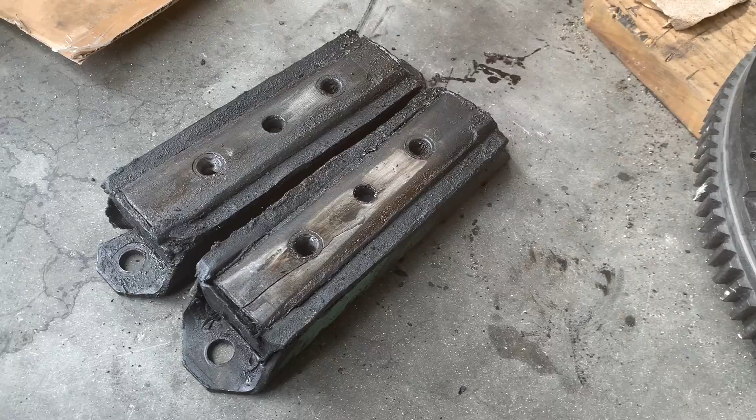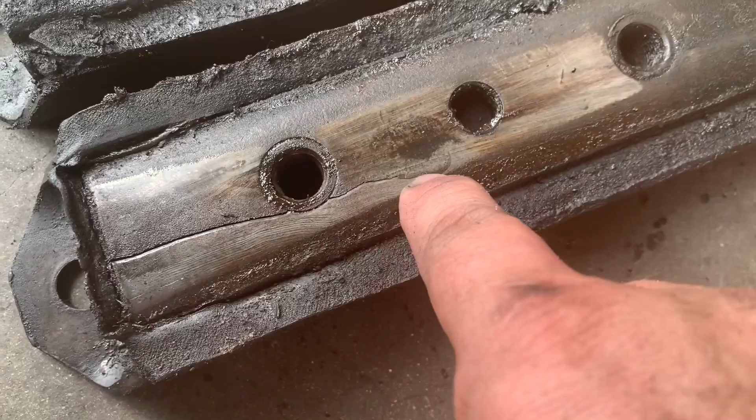So these GM mounts really needed to be changed. These are the engine mounts, the motor mounts. This one here, there's a big split, crack down the metal there. But the bigger problem with it is that you see this side here is recessed and this side is raised. So I'll turn it to a side here. So the rubber has compressed where it's not in alignment.

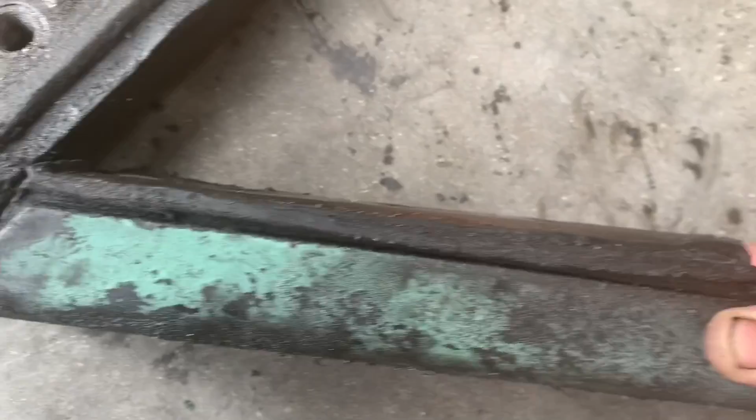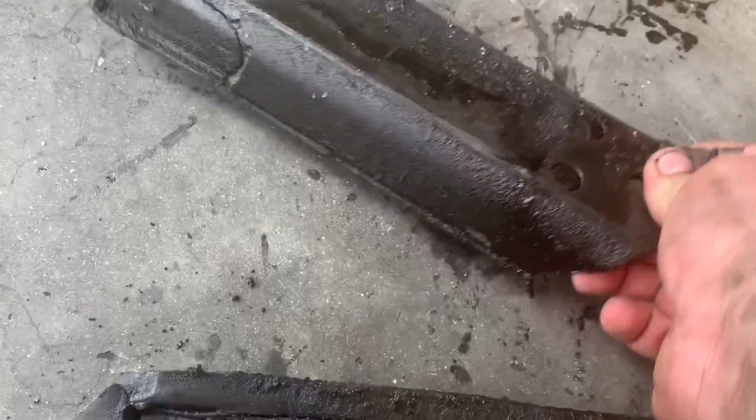Now, I originally thought one of these was missing the bolt that goes here, but it turns out both of them were missing a bolt. So they only had one bolt in each side. And then this one looks pretty good here. It's like height-wise and rubber-wise, but something has caused a lot of stress to it that the metal is just cracked and broken away. It's broken this way, there's a break there, and then this whole side has broken off.

So I don't know what kind of a strange load that would be that would do that, but this was the side that was missing the bolt. So, oh, and this one was just finger tight too, so that's really been loose in there. Obviously the whole motor was moving around. He had a lot of clutch chatter, but that was making the whole engine move too, because they were missing bolts and loose bolts and bad rubber.

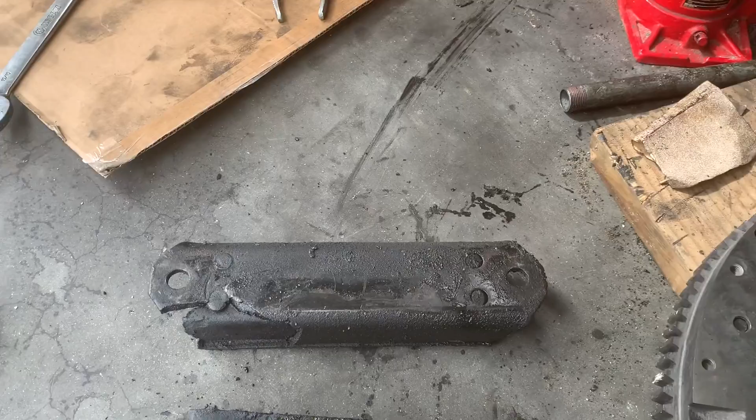So I've got it jacked up now. I didn't pull the studs out on this one because I had the transmission off. This is the easiest way to do it. And I'll just get the new one slid back in there. Get the new engine mounts on, and then get the flywheel back on today. The clutch is supposed to come in today.

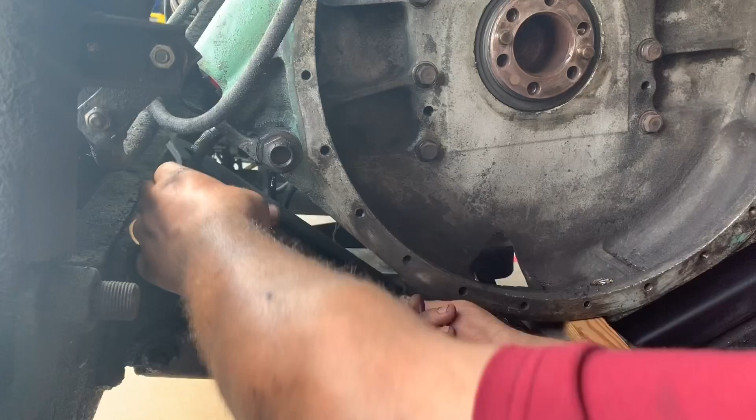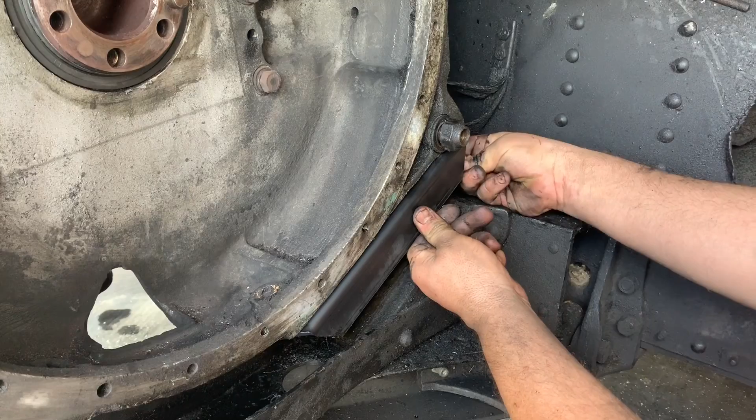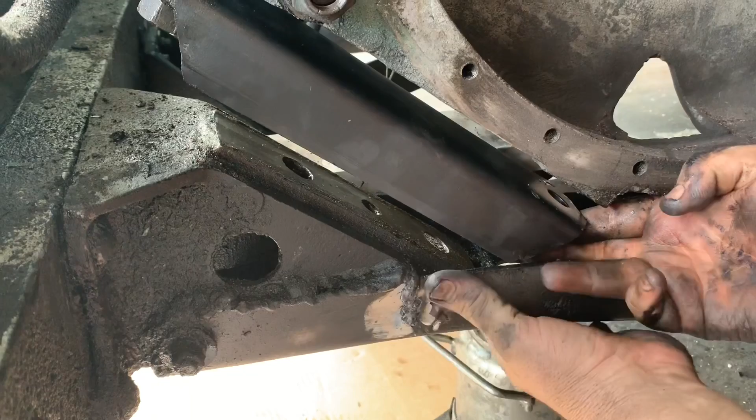All right, so I got it jacked up here, and I'm gonna put the new mounts in. And I'll lower it back down somewhat, and then get it ready to go. Lose a finger if it comes down.

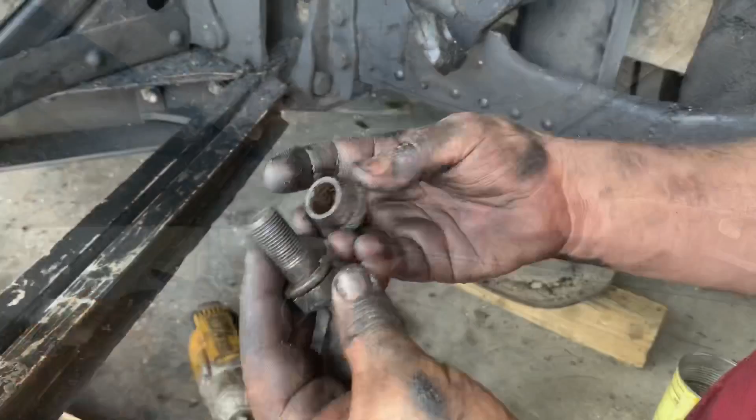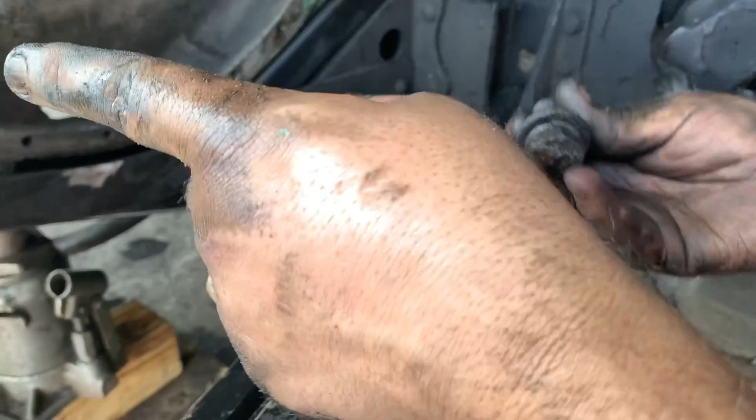So on the bottom side of this mount where it goes into the motor mount, there's a tapered cone, so it helps you with the alignment. So you can get it pretty close, and then as the cone comes in, it'll center it up. But I still use like a drift pin when I was lowering it down to keep things pretty close to being centered, so these should go in. Both of these, again, were missing one of these complete setups, and this one was just finger loose, and so one motor mount was actually tight.

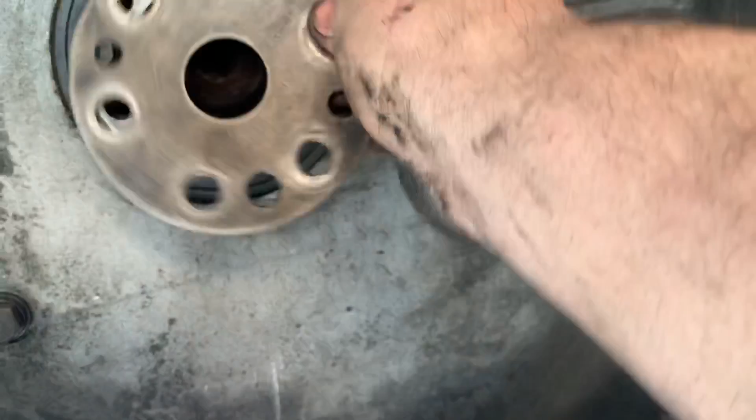One thing I want to talk about is when you go to put that flywheel back on, there is a correct direction that it goes. The holes are not perfectly centered with these two dowels. So I've done it before where I've gone through all the trouble of getting the flywheel up in there and get it on, get it hanging on these two dowels, and then your bolt holes don't line up. So just to show you, what am I doing? So there, everything lines up.

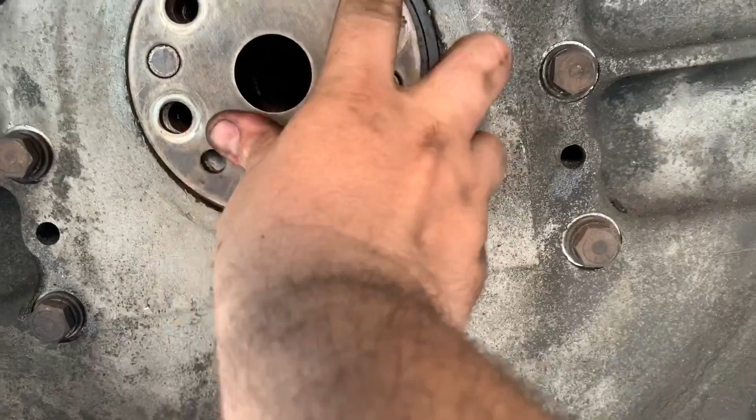But if I turn it over 180 degrees, you can go through all the trouble of getting the flywheel to hang on there, and then you'll see that the bolt holes don't line up. So you can't possibly put it on wrong, but you can get it hung on the dowels and go through all the effort, wasted energy of doing that. So I'm gonna know now that I'm not gonna spin my crankshaft here. Pay attention to what you're doing.

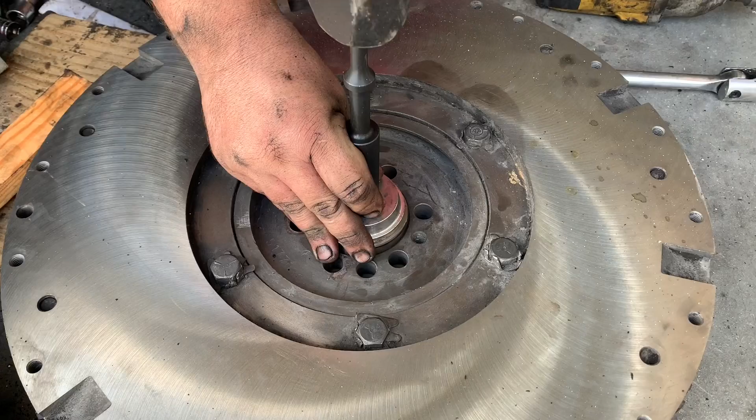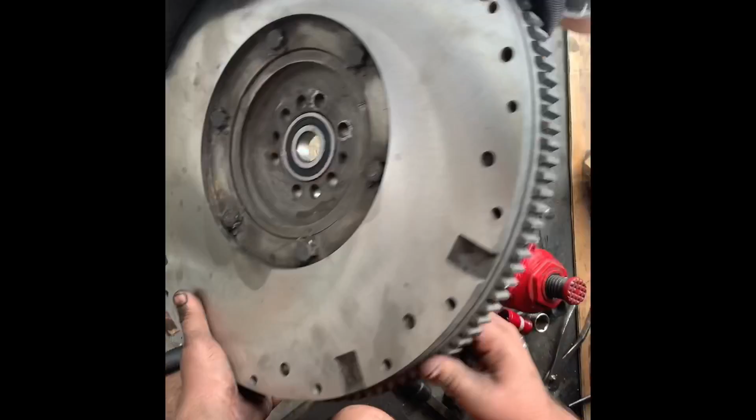And then I'll mark this here, that this is the top of the engine. And then when this is on my flywheel and I go to hang the flywheel on, I'll know which way it goes. Just gonna knock in this pilot bearing. Which way? Okay, which way's the top? This is the top here, and that'll be the correct way. Okay, ready? This way? 1, 2, 3.

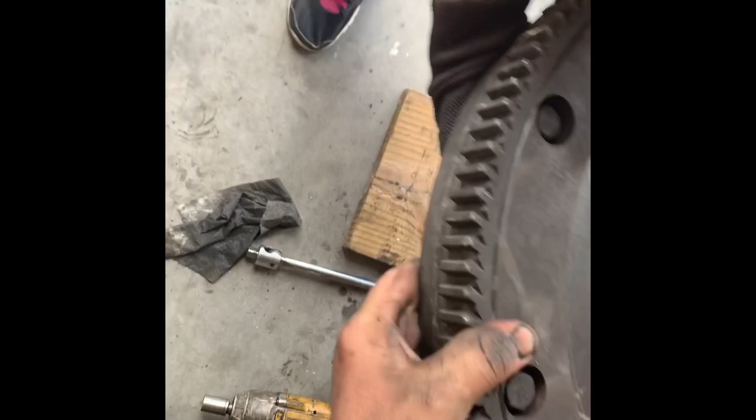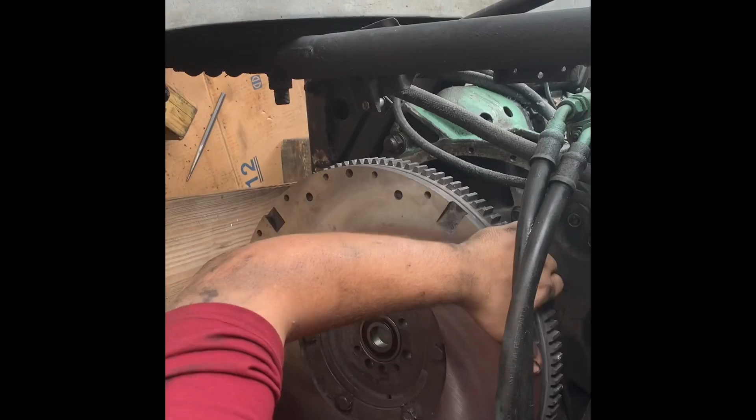Okay. Got it? Yep. These don't really move. So this is the flywheel going back into 1957 PD 4104 that's known as the Cool Cruiser. And as you can see, it's very heavy, but it's ready to get lined up now.

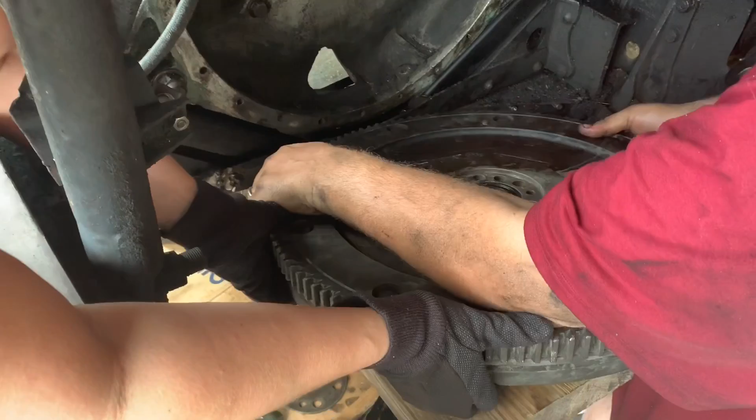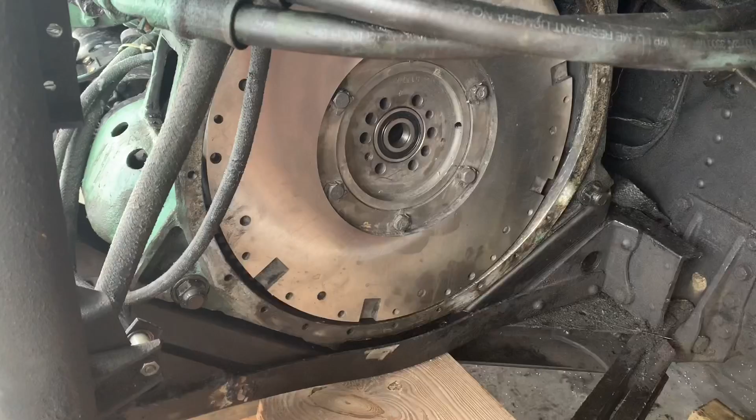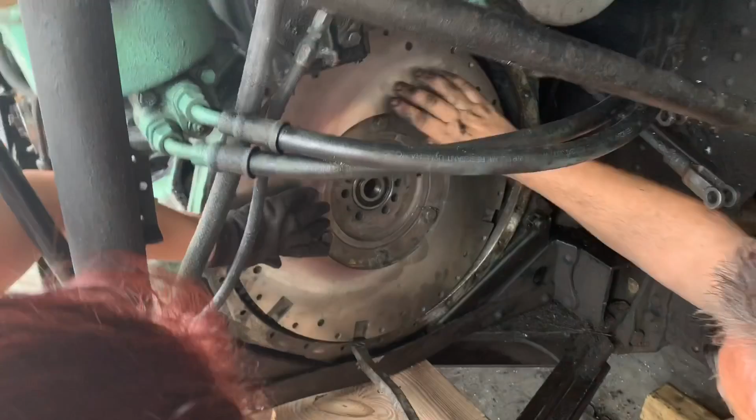Hold on, my fingers there. Watch your fingers. Hooray! It's in there. It's almost where it needs to be. Almost. But the worst part's over. It's not quite lined up though. That sucks. Where's the... This is the top, so okay.

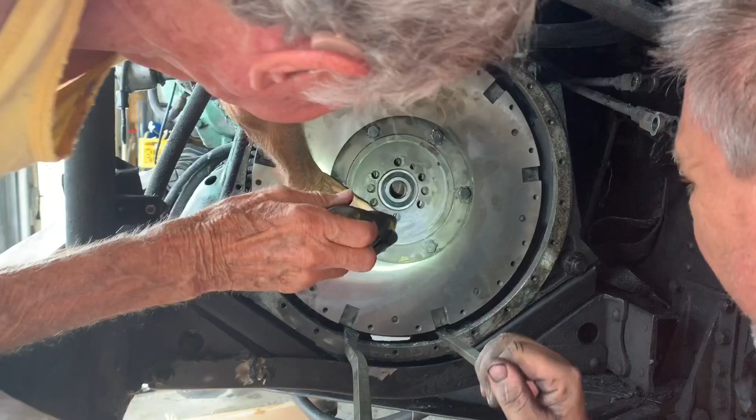I gotta clock it just a little bit here. So now we have to line it up with the dowel pins. Stop. That good? Go back, hang on a second. Where's my... Okay, stop. Stop. Yep. It doesn't want to go. I see the hole right there. She's right there.

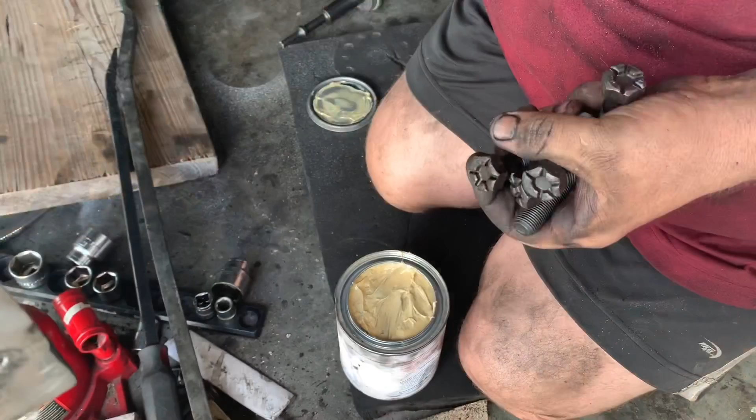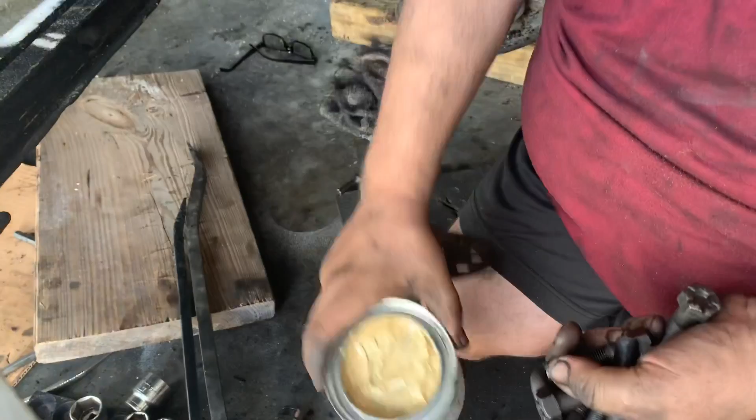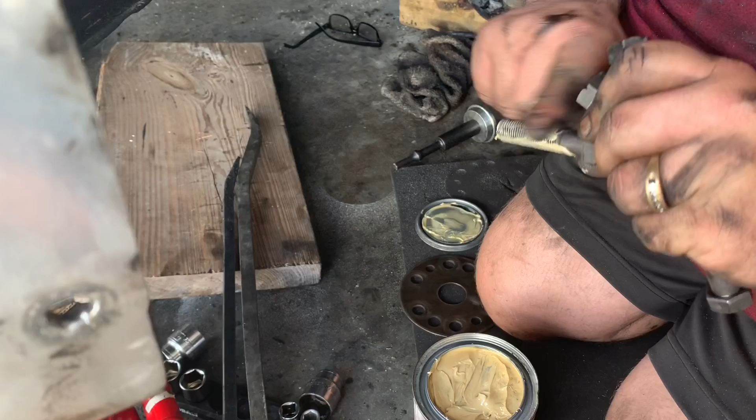Okay, so we're gonna put the flywheel on. We've got all new flywheel bolts. You never want to reuse these bolts. And you want to make sure that you use International Compound Number 2, known as peanut butter. It's sold by Detroit Diesel, and it is a thread lubricant that you lubricate the threads with. That's all part of the torquing procedure. And the last one didn't have these. Whoops. Look at that.

And for the record, please note, and you can get a video of me, that Frank is holding on his own flywheel. The old man is holding on the flywheel. It's a pretty heavy flywheel too. It weighs more than Frank. Yeah, the flywheel weighs more than I do. That's neat.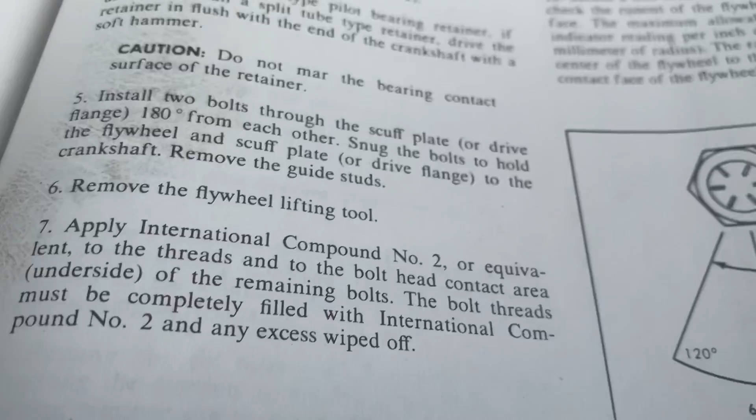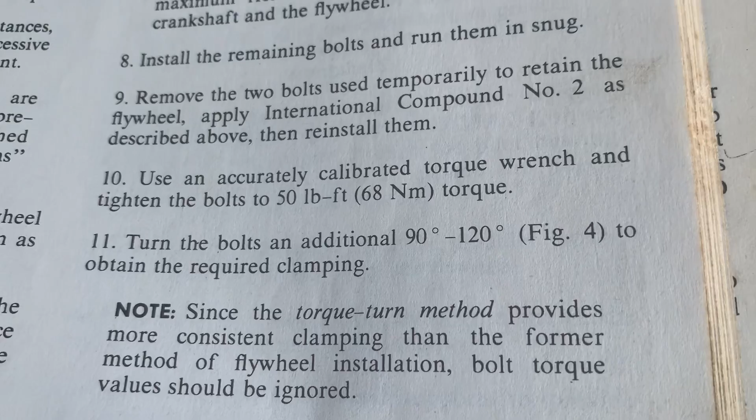And just quickly pointing out the procedure for the flywheel bolts, where you use the International Compound Number 2 on them. And then when you torque them, you go to 50 pounds, number 10 there, go to 50 pounds. And then once they're all at 50 pounds, then you turn them an additional 90 degrees to 120 degrees. So, 90 degrees, which would be straight across there, and then 120.

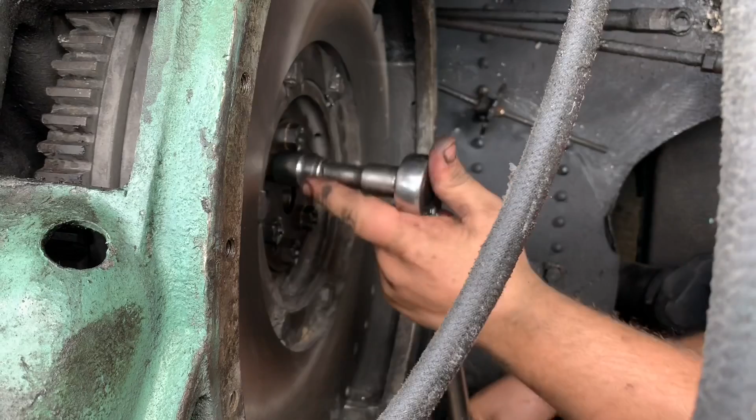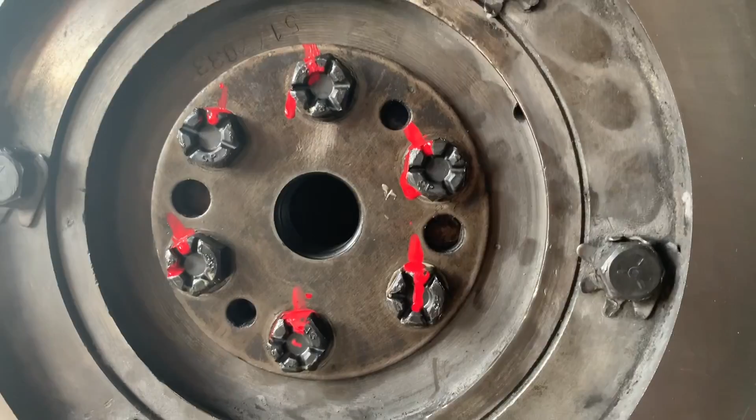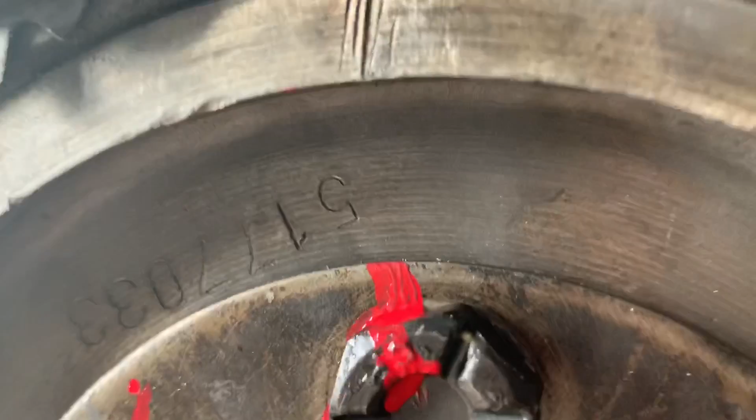So I mark them, which the paint's kind of running, but I mark them when I start, just so I know, I have a reference. And then I can go the 90 degrees from there. So Frank has a pry bar stuck between the teeth and the bell housing here that's going to stop the flywheel from spinning, because otherwise I don't want to turn the crankshaft over when I'm tightening here. Frank's over here. Hello again.

When the clutch disc goes on, you see it is marked for us, flywheel side. So this surface here is going to go up into there. So I'm going to lay it on this board and then get the bottom lip up in there, raise it up, and then we'll lift it and center it with some pry bars.

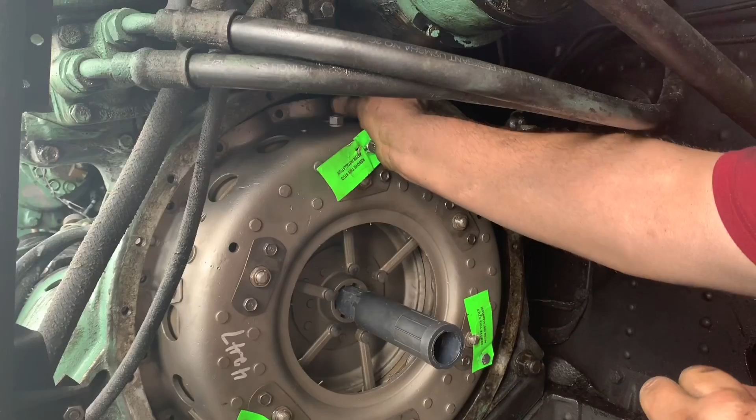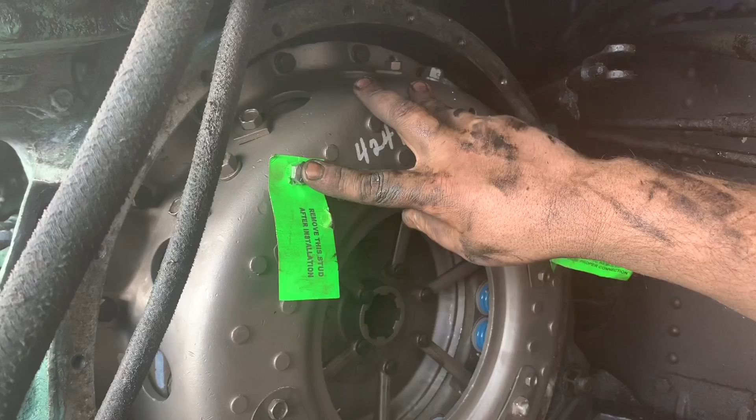Once you have the clutch installed, you can now remove, there's 3 bolts here, 1, 2, and 3. Those are holding the tension. So otherwise when you were screwing it on, you'd have been going against the springs on it and it would just be too hard to line everything up and do it. So that's what those do. So you just take these out.

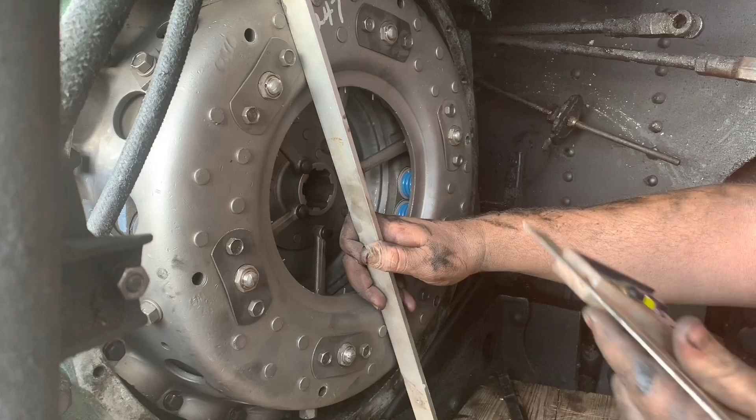So using a straight edge across the top of the clutch housing here, this is a 4104. The clutch is 1 3/8 that the height needs to be from the straight edge here to the top of that finger right there. I need to adjust for the 1 inch of thickness of my straight edge. So 2 3/8. This is going to get me from the top.

So I will need to bring that finger up until it touches where I have that there, and then that will be 1 3/8. 1, 2, 3/8, correct, 1 3/8 from the top of this housing to the finger. So not including, don't count the rivets, it's from the flat part here. And you got to get these all in sync here, and this is the best way to do it. So they're considerably far off right now, and we'll just dial them in with the adjustment here.

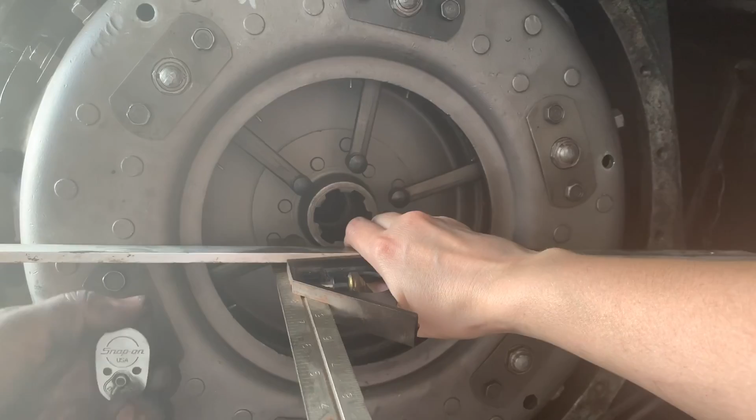Come down. Right there, zoom in there. Feels like it hit right there.